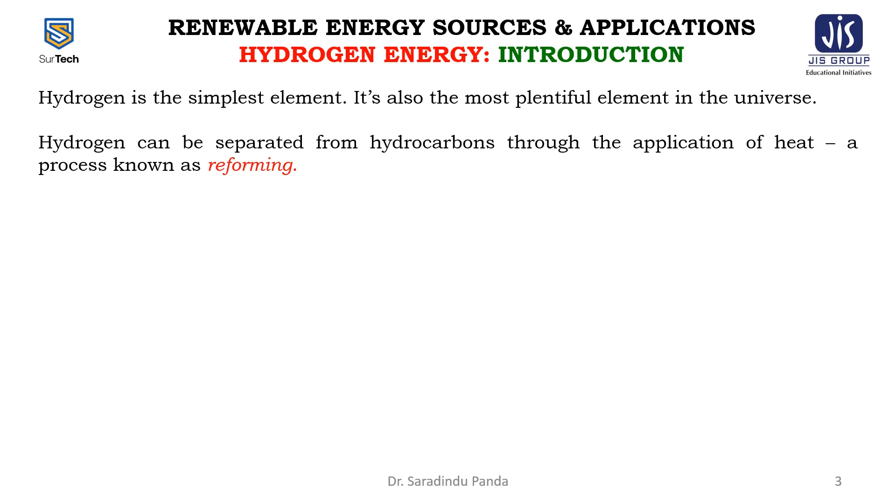Water, for example, is a combination of hydrogen and oxygen. Hydrogen is also found in many organic compounds, notably the hydrocarbons that make up many of our fuels, such as gasoline, natural gas, methanol, and propane. Hydrogen can be separated from hydrocarbons through the application of heat, a process known as reforming. Currently, most hydrogen is made this way from natural gas.

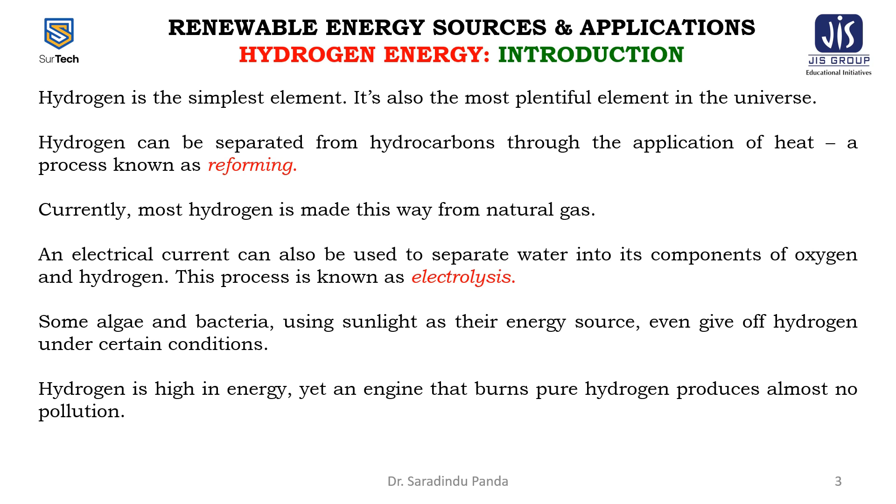An electrical current can also be used to separate water into its components of oxygen and hydrogen. This process is known as electrolysis. This is very much common to all. Some algae and bacteria, using sunlight as their energy source, even give off hydrogen under certain conditions. Hydrogen is high in energy, yet an engine that burns pure hydrogen produces almost no pollution.

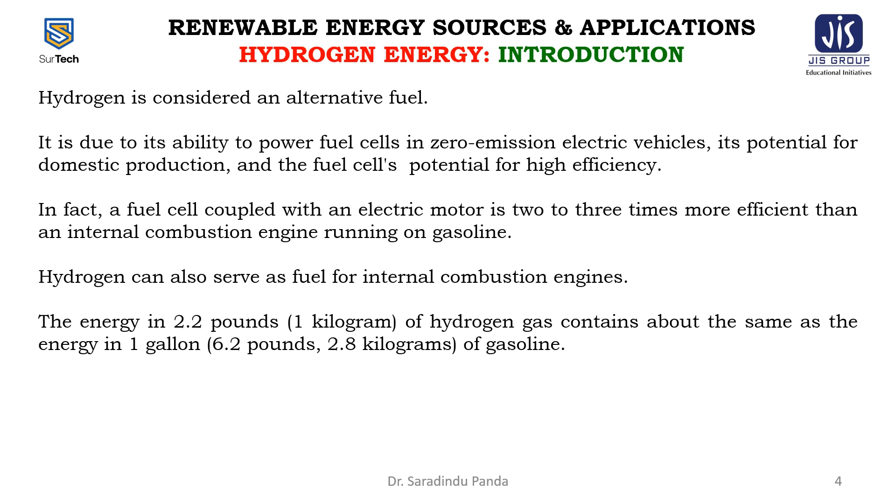Hydrogen is considered an alternative fuel due to its ability to power fuel cells in zero emission electric vehicles, its potential for domestic production and the fuel cell's potential for high efficiency. In fact, a fuel cell coupled with an electric motor is 2 to 3 times more efficient than an internal combustion engine running on gasoline. Hydrogen can also serve as fuel for internal combustion engines. The energy in 2.2 pounds of hydrogen gas is about the same as the energy in 1 gallon of gasoline.

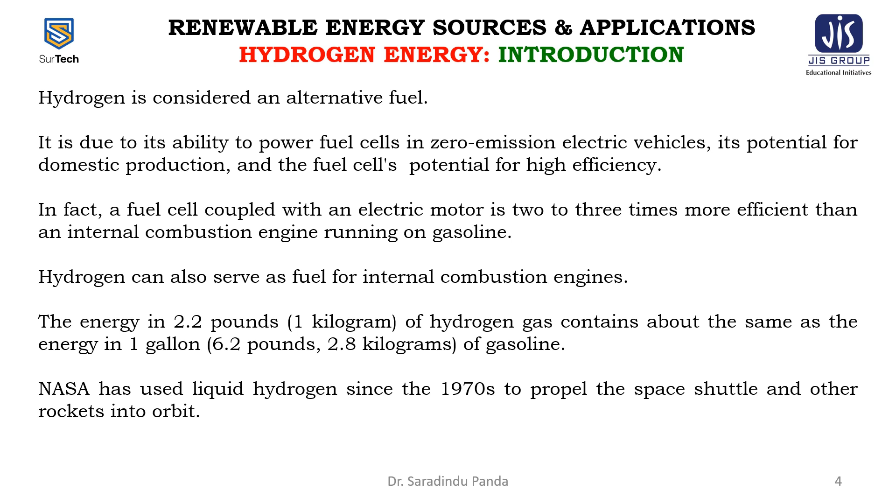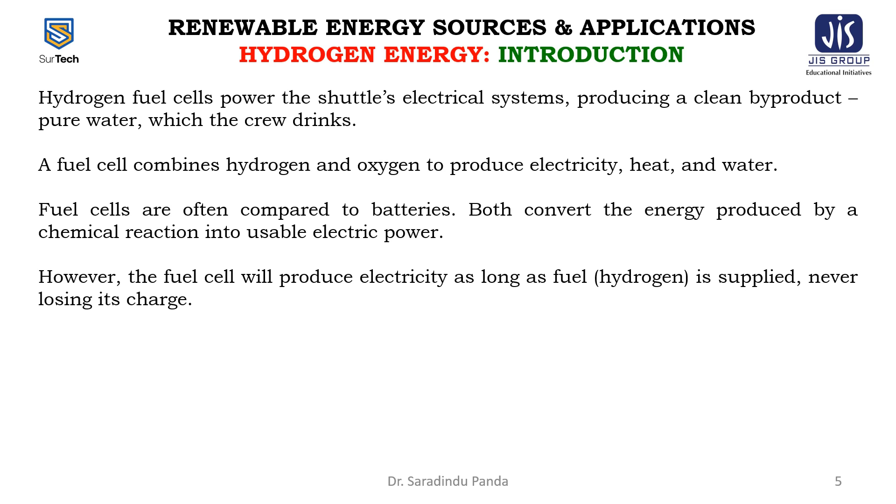NASA has used liquid hydrogen since the 1970s to propel the space shuttle and other rockets into orbit. Hydrogen fuel cells power the shuttle's electrical systems, producing a clean byproduct, pure water, which the crew drinks. A fuel cell combines hydrogen and oxygen to produce electricity, heat, and water. Fuel cells are often compared to batteries. Both convert the energy produced by a chemical reaction into usable electric power. However, the fuel cell will produce electricity as long as fuel is supplied, never losing its charge.

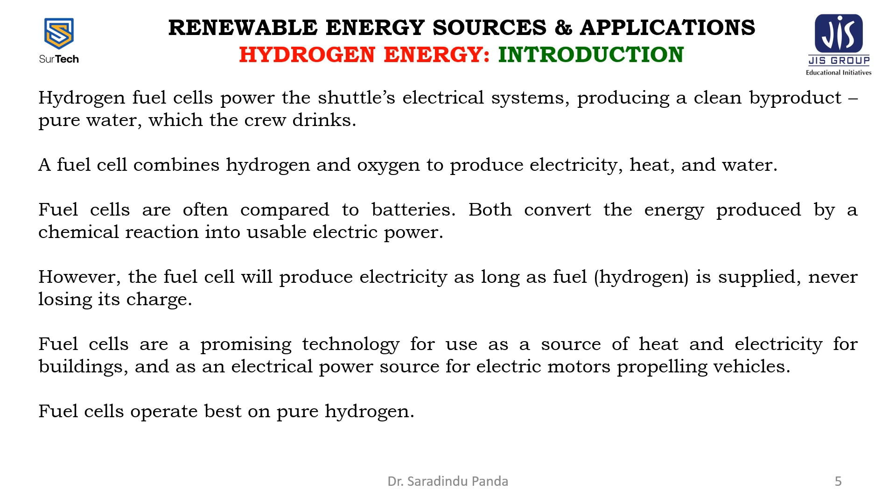Fuel cells are a promising technology for use as a source of heat and electricity for buildings and as an electrical power source for the electric motors propelling vehicles. Fuel cells operate best on pure hydrogen, but fuels like natural gas, methanol or even gasoline can be reformed to produce the hydrogen required for the fuel cell. Some fuel cells can even be fueled directly with methanol without using a reformer.

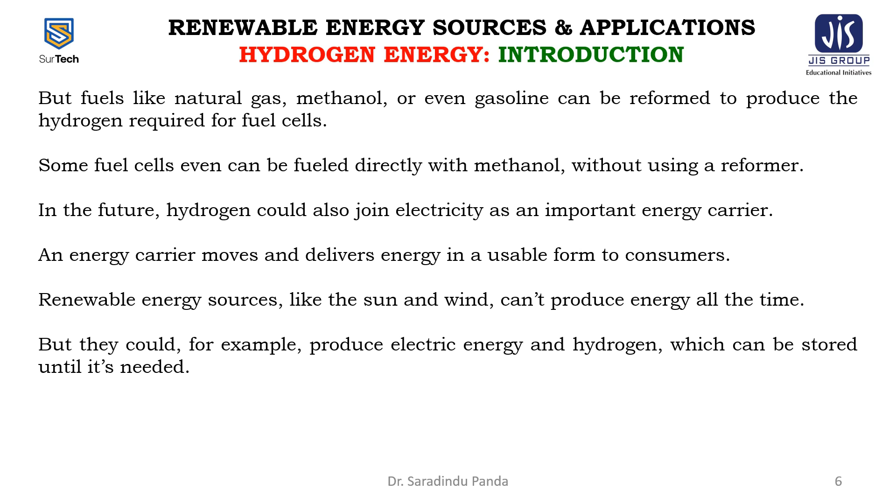In the future, hydrogen could also join electricity as an important energy carrier. An energy carrier moves and delivers energy in a usable form to consumers. Renewable energy sources like the sun and wind cannot produce energy all the time, but they could, for example, produce electric energy and hydrogen, which can be stored until it's needed. Hydrogen can also be transported to the locations where it is needed. This is the hydrogen cycle.

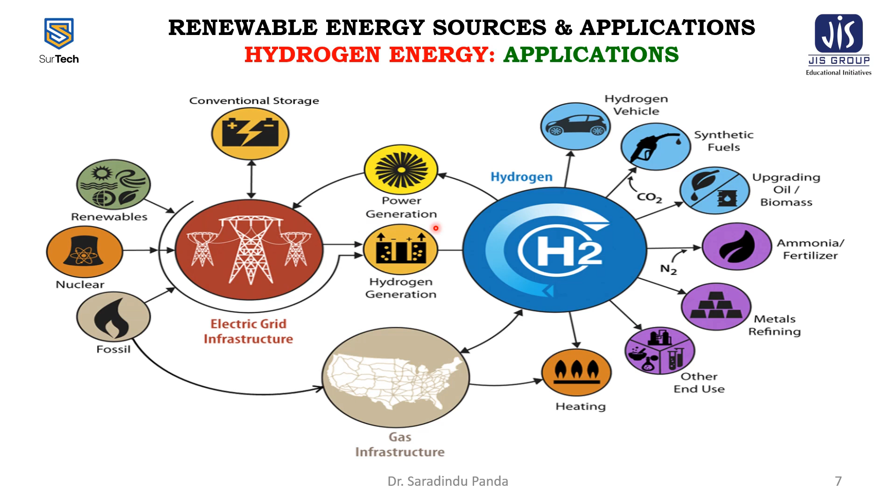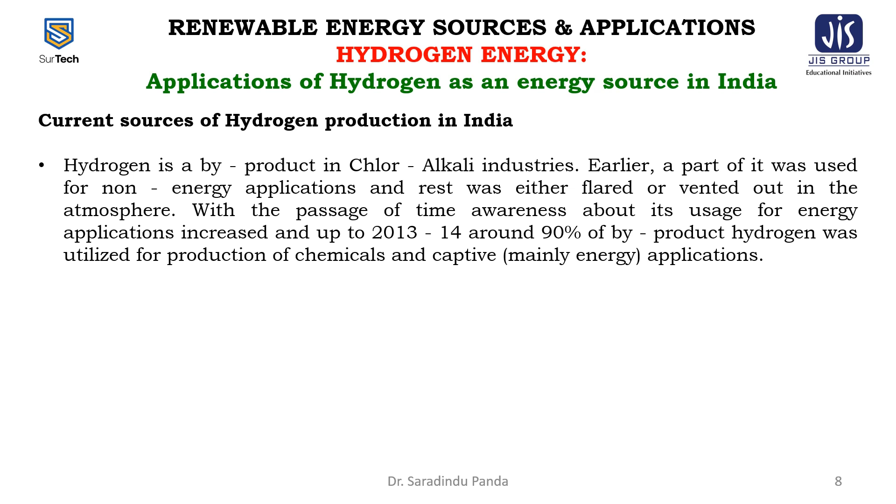The applications of hydrogen as an energy source in India. The current source of hydrogen production in India: the hydrogen is a byproduct of chlor-alkali industries. Earlier a part of it was used for non-energy applications and the rest was either flared or vented out into the atmosphere. With the passage of time, awareness about its usage for energy applications increased, and up to 2013-14 around 90% of the byproduct hydrogen was utilized for the production of chemicals and captive applications.

Hydrogen is produced for non-energy applications like in fertilizer industries and petroleum refineries. As per the National Hydrogen Energy Roadmap, called NHERM, with a view to accelerate the development of the hydrogen energy sector in India, a National Hydrogen Energy Roadmap was prepared and adopted by the National Hydrogen Energy Board in January 2006 for implementation.

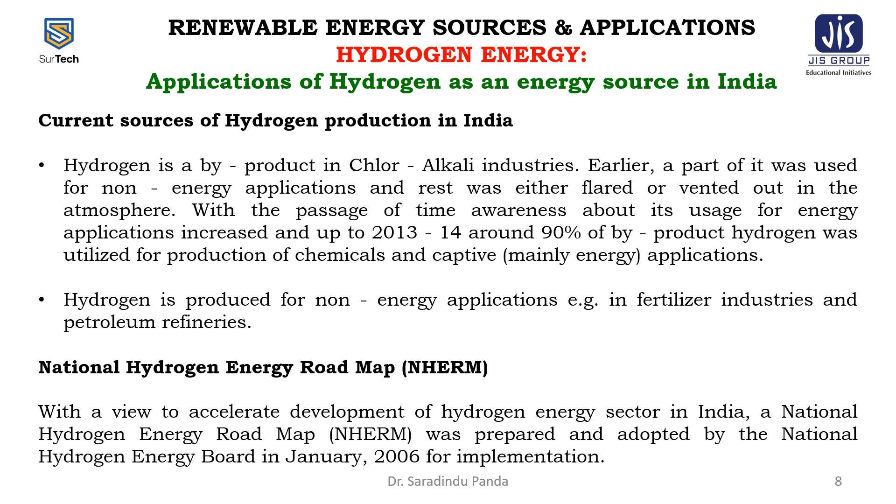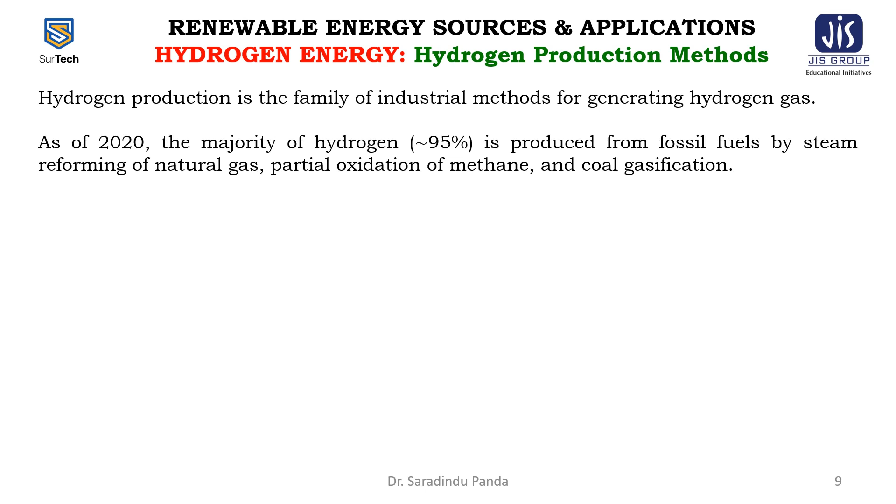Now the very important stage of my lecture, that is the hydrogen production methods. Hydrogen production is the family of industrial methods for generating hydrogen gas. As of 2020, the majority of hydrogen, approximately 95% of it, is produced from fossil fuels by steam reforming of natural gas, partial oxidation of methane, and coal gasification. Other methods of hydrogen production include biomass gasification and electrolysis of water.

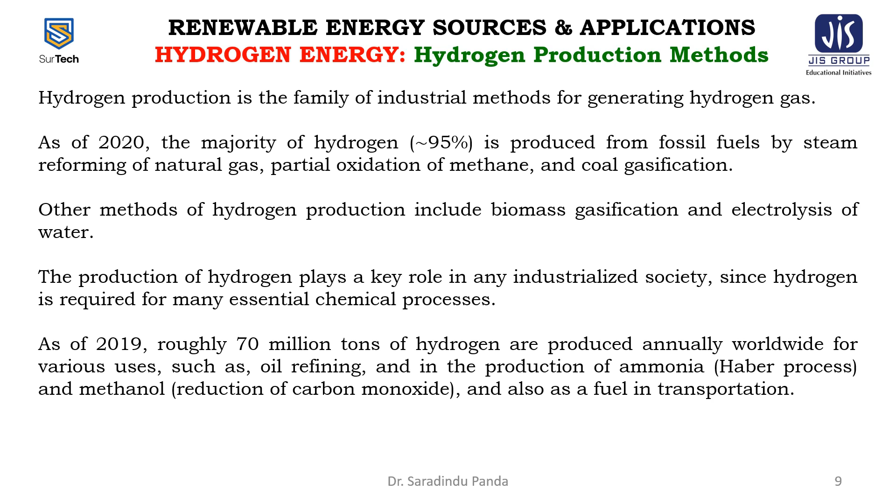The production of hydrogen plays a key role in any industrialized society, since hydrogen is required for many essential chemical processes. As of 2019, roughly 70 million tons of hydrogen are produced annually worldwide for various uses such as oil refining and in the production of ammonia, methanol, and also as a fuel in transportation. There are four main sources for the commercial production of hydrogen, that is natural gas, oil, coal, and electrolysis, which account for 48%, 30%, 18%, and 4% respectively of the world's hydrogen production.

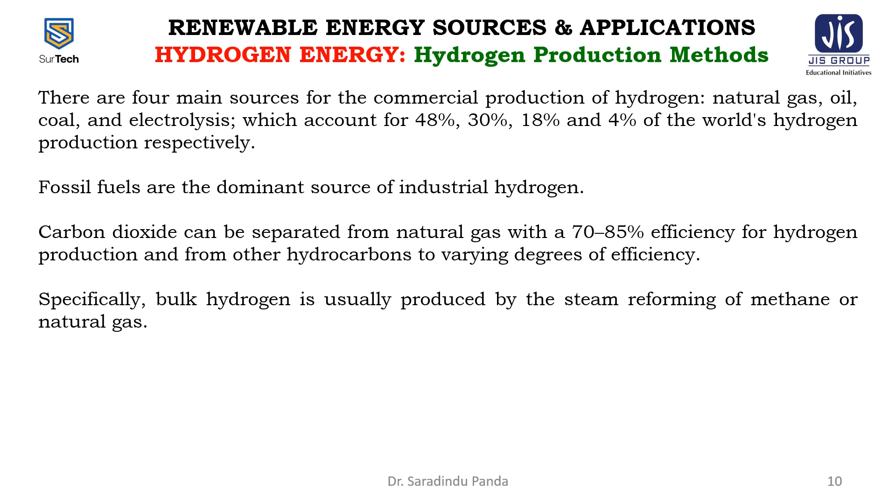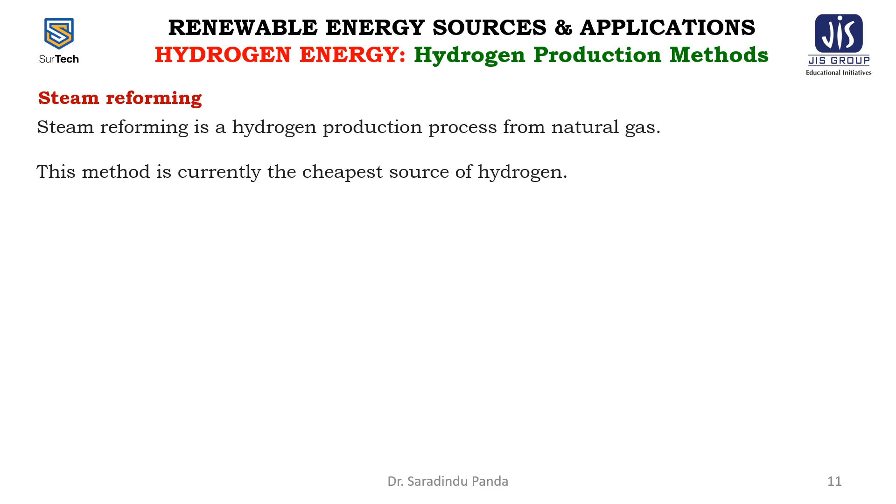Fossil fuels are the dominant source of industrial hydrogen. Carbon dioxide can be separated from natural gas with a 70 to 85% efficiency for hydrogen production, and from other hydrocarbons to varying degrees of efficiency. Specifically, bulk hydrogen is usually produced by the steam reforming of methane or natural gas. Hydrogen production methods: the first method is steam reforming. Steam reforming is a hydrogen production process from natural gas. This method is currently the cheapest source of hydrogen.

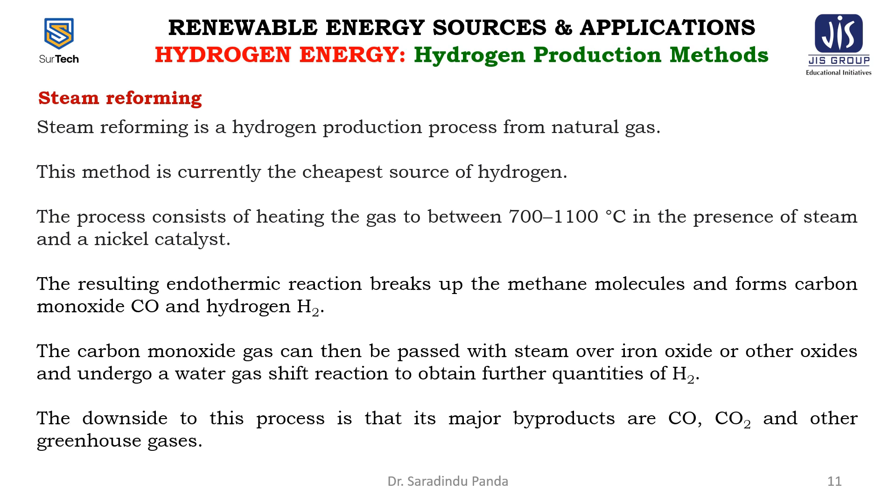The process consists of heating the gas to between 700 and 1100 degrees centigrade in the presence of steam and a nickel catalyst. The resulting endothermic reaction breaks up the methane molecules and forms carbon monoxide and hydrogen. The carbon monoxide gas can then be passed with steam over iron oxide or other oxides and undergo a water gas shift reaction to obtain further quantities of hydrogen. The downside to this process is that its major byproducts are carbon dioxide, carbon monoxide and other greenhouse gases.

Depending on the quality of the feedstock, natural gas, rich gases, naphtha, 1 ton of hydrogen produced will also produce 9 to 12 tons of carbon dioxide. For this process, at high temperature, 700 to 1100 degrees centigrade, steam reacts with methane in an endothermic reaction to yield syngas: CH4 + H2O → CO + 3H2. In a second stage, additional hydrogen is generated through the lower temperature exothermic water gas shift reaction performed at 360 degrees centigrade: CO + H2O → CO2 + H2.

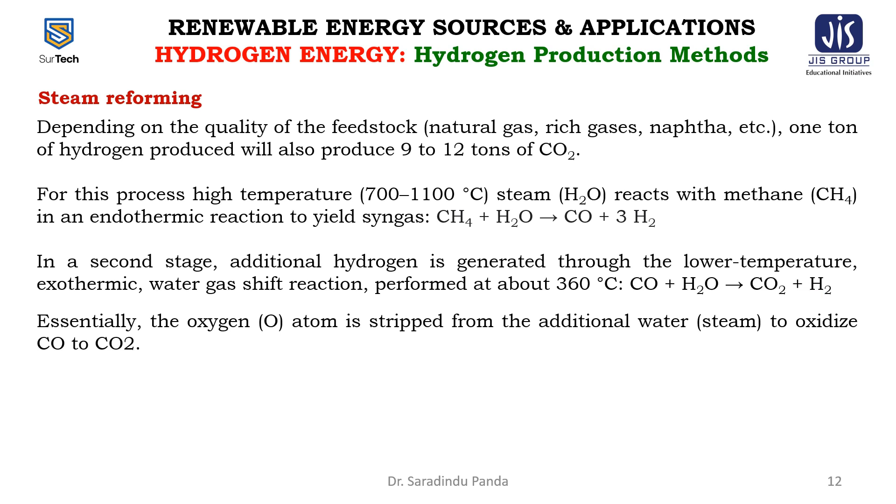Essentially, the oxygen atom is stripped from the additional water, that is steam, to oxidize the carbon monoxide to carbon dioxide. This oxidation also provides the energy to maintain the reaction. Additional heat required to drive the process is generally supplied by burning some portion of the methane.

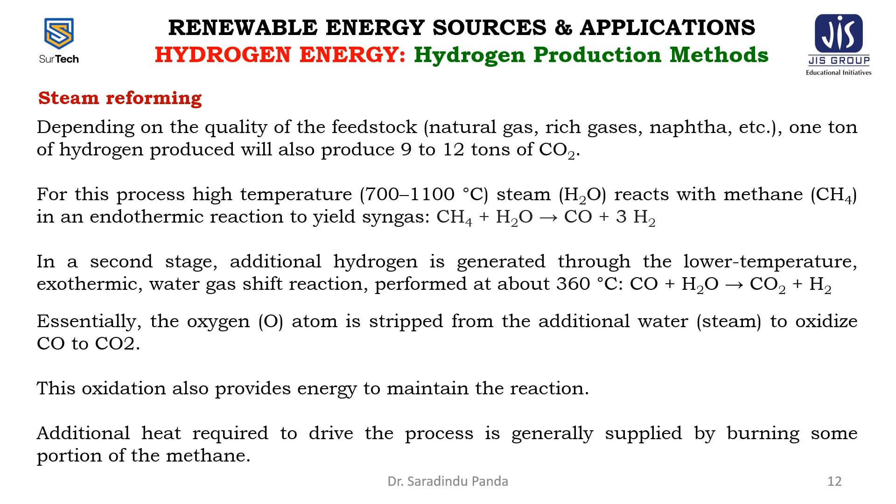The second method is from water. Methods to produce hydrogen without the use of fossil fuels involve the process of water splitting, or splitting the water molecule into its components oxygen and hydrogen. When the source of energy for water splitting is renewable or low carbon, the hydrogen produced is sometimes referred to as green hydrogen. The conversion can be accomplished in several ways, but all methods are generally more expensive than fossil fuel based production methods.

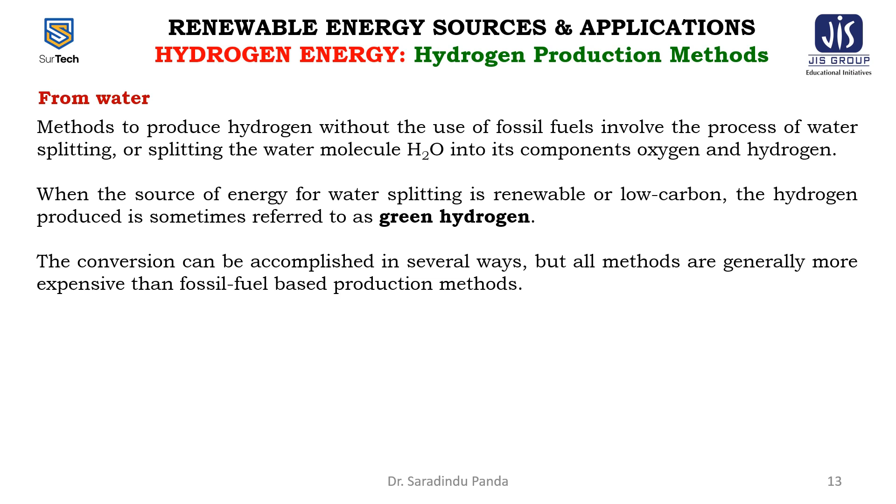Electrolysis is the common method to split water and yield hydrogen and oxygen. Electrolysis consists of using electricity to split water into hydrogen and oxygen. Electrolysis of water is 70 to 80% efficient, while steam reforming of natural gas has a thermal efficiency between 70 and 85%.

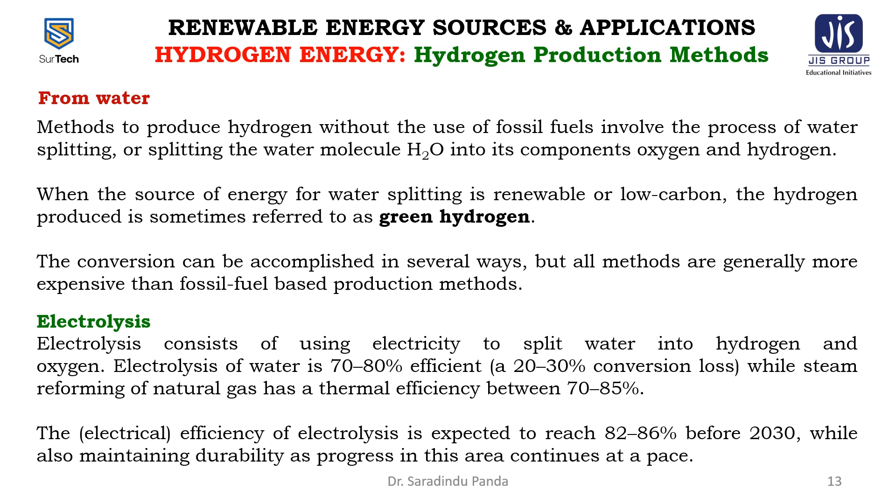The efficiency of electrolysis is expected to reach 82 to 86% before 2030, while also maintaining durability as progress in this area continues at a pace.

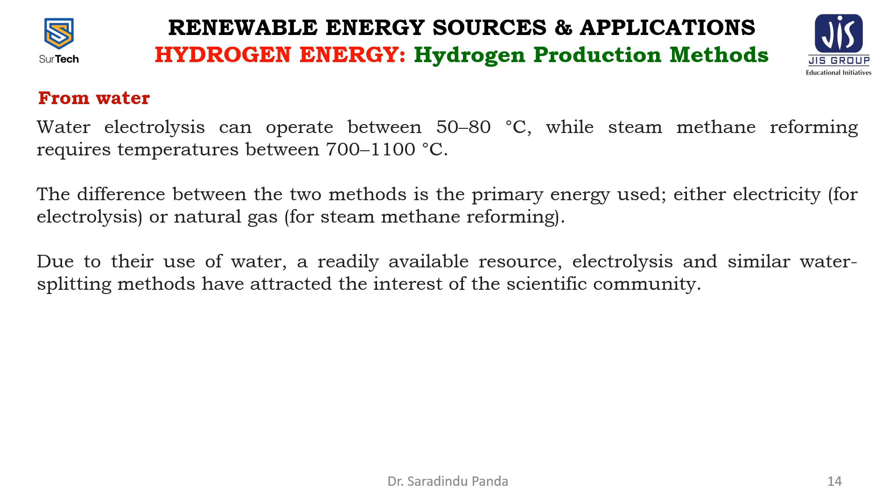Water electrolysis can operate between 50 to 80 degrees centigrade, while steam methane reforming requires temperatures between 700 to 1100 degrees centigrade. The difference between the two methods is the primary energy used, either electricity or natural gas. Due to their use of water, a readily available resource, electrolysis and similar water splitting methods have attracted the interest of the scientific community.

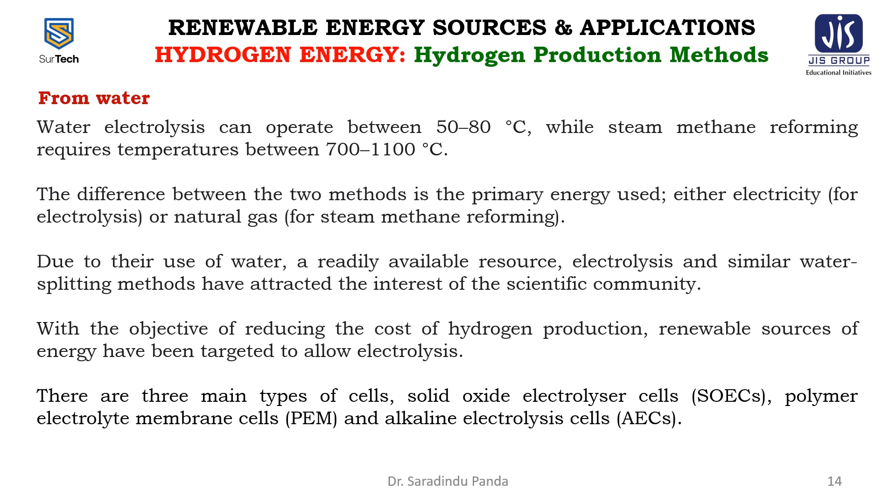With the objective of reducing the cost of hydrogen production, renewable sources of energy have been targeted to allow the electrolysis. There are three main types of cells: solid oxide electrolyzer cells, called SOEC, polymer electrolyte membrane cell, called PEM, and alkaline electrolysis cells, called AEC.

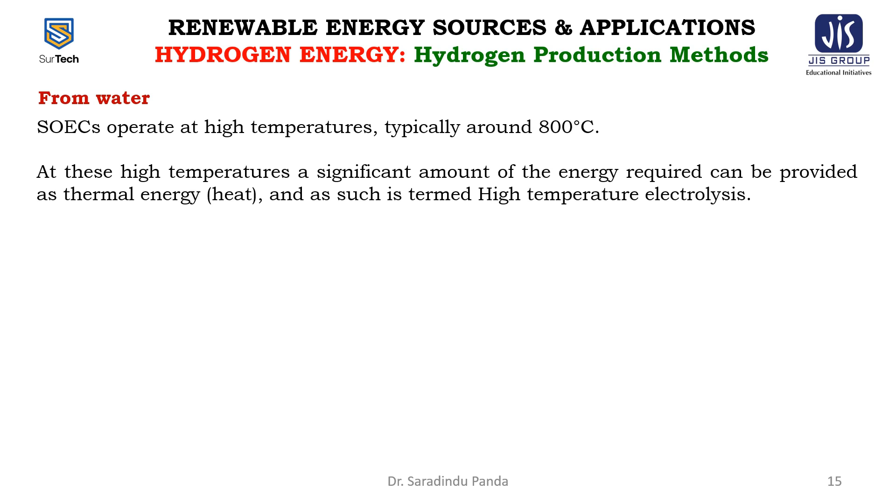The SOECs operate at high temperatures, typically around 800 degrees centigrade. At these high temperatures, a significant amount of the energy required can be provided as thermal energy, and as such it is termed high temperature electrolysis. The heat energy can be provided from a number of different sources, including waste industrial heat, nuclear power stations, or concentrated solar thermal plants. This has the potential to reduce the overall cost of the hydrogen produced by reducing the amount of electrical energy required for electrolysis.

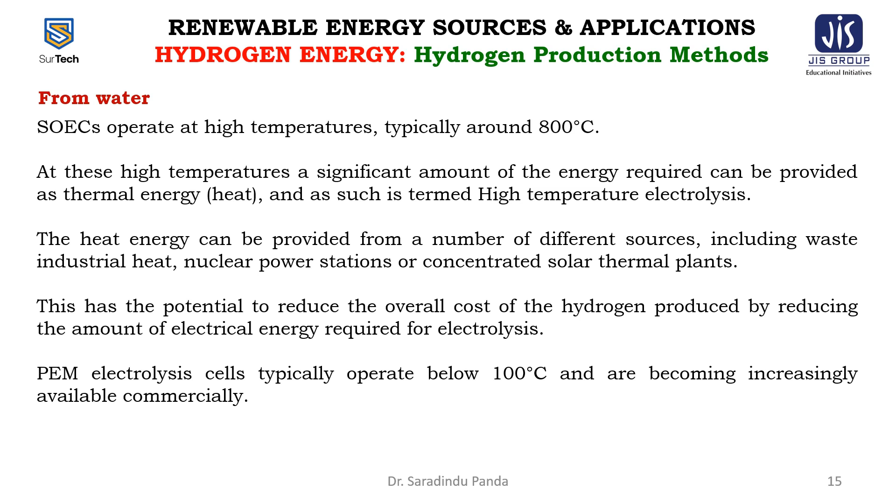PEM electrolysis cells typically operate below 100 degrees centigrade and are becoming increasingly available commercially. These cells have the advantage of being comparatively simple and can be designed to accept widely varying voltage inputs, which makes them ideal for use with renewable sources of energy such as solar photovoltaic cells.

The AECs optimally operate at high concentrations of electrolyte such as KOH or potassium carbonate, and at high temperatures close to 200 degrees centigrade.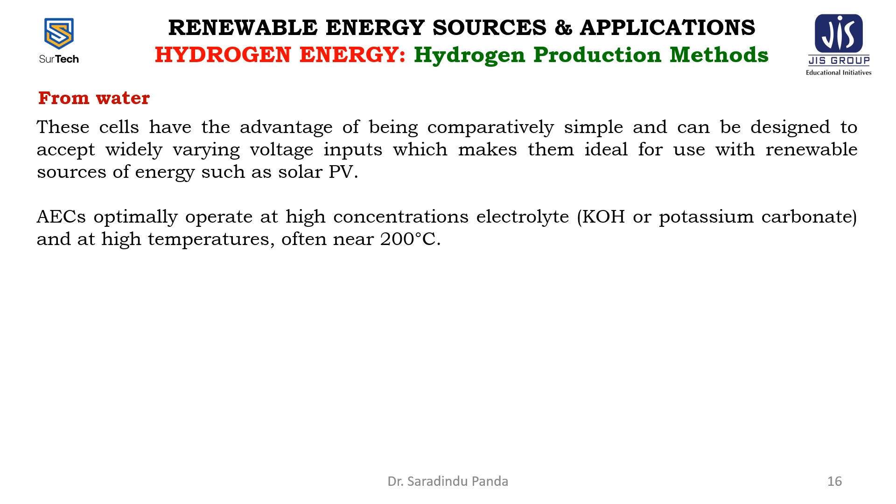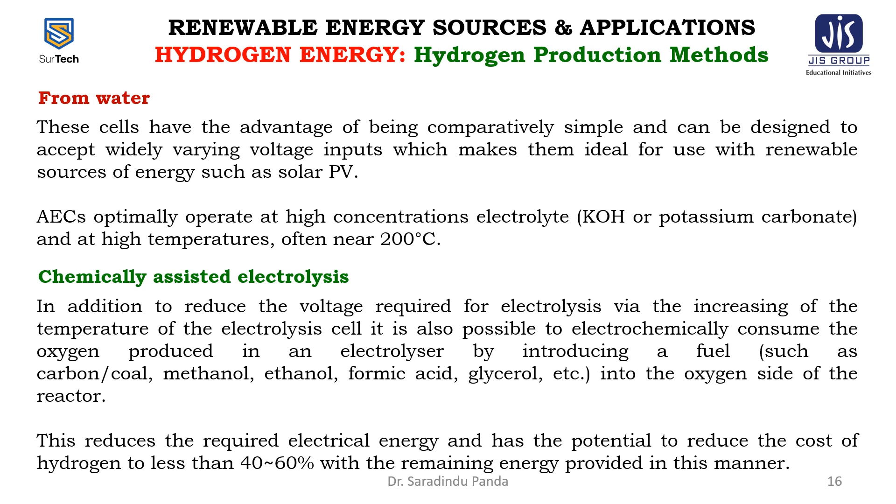Now, chemically assisted electrolysis. In addition to reducing the voltage required for electrolysis via increasing the temperature of the electrolysis cell, it is also possible to electrochemically consume the oxygen produced in an electrolyzer by introducing a fuel such as carbon, coal, methanol, ethanol, formic acid, glycerol, etc. into the oxygen side of the reactor. This reduces the required electrical energy and has the potential to reduce the cost of hydrogen to less than 40 to 60% with the remaining energy provided in this manner.

In addition, carbon or hydrocarbon assisted water electrolysis, called CAWE, has the potential to offer a less energy intensive, cleaner method of using the chemical energy in various sources of carbon such as low rank and high sulfur coals, biomass, alcohols, and methane, where the pure carbon dioxide produced can be easily sequestered without the need for separation.

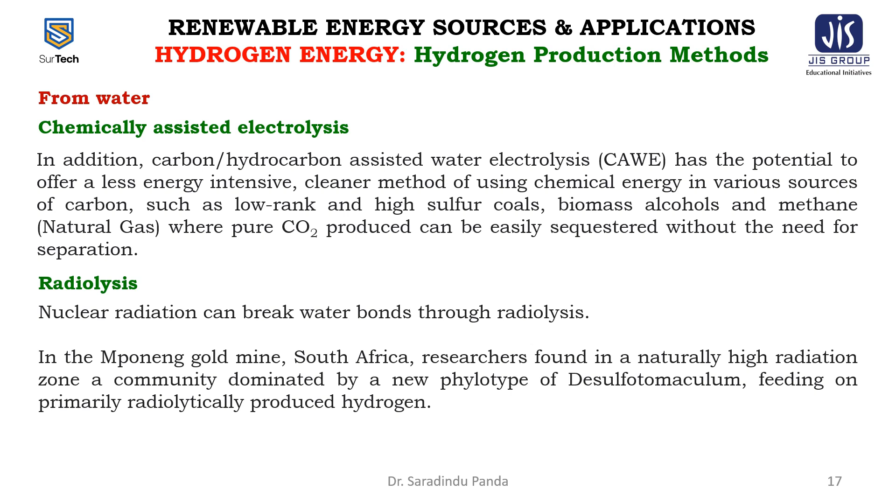Second is radiolysis. Nuclear radiation can break the water bonds through radiolysis. In the Mponeng gold mine in South Africa, researchers found in a naturally high radiation zone a community dominated by a new phylotype of Desulfotomaculum feeding primarily on radiolytically produced hydrogen. Spent nuclear fuel is also being looked at as a potential source of hydrogen.

Thermolysis. Water spontaneously dissociates at around 2500 degrees centigrade, but this thermolysis occurs at temperatures too high for usual process piping and equipment. Catalysts are required to reduce the dissociation temperature.

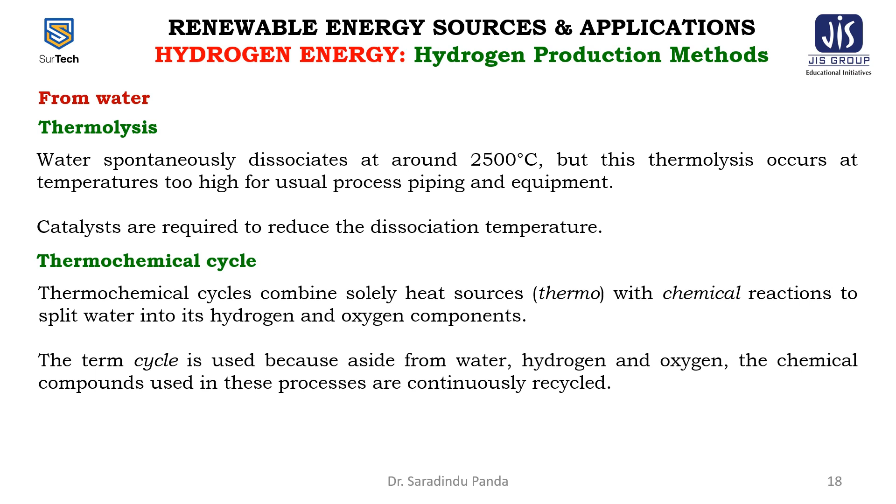Thermochemical cycle. Thermochemical cycles combine solely heat sources with chemical reactions to split water into its hydrogen and oxygen components. The term cycle is used because, aside from water, the hydrogen and oxygen, the chemical compounds used in this process are continuously recycled. If electricity is partially used as an input, the resulting thermochemical cycle is defined as a hybrid cycle.

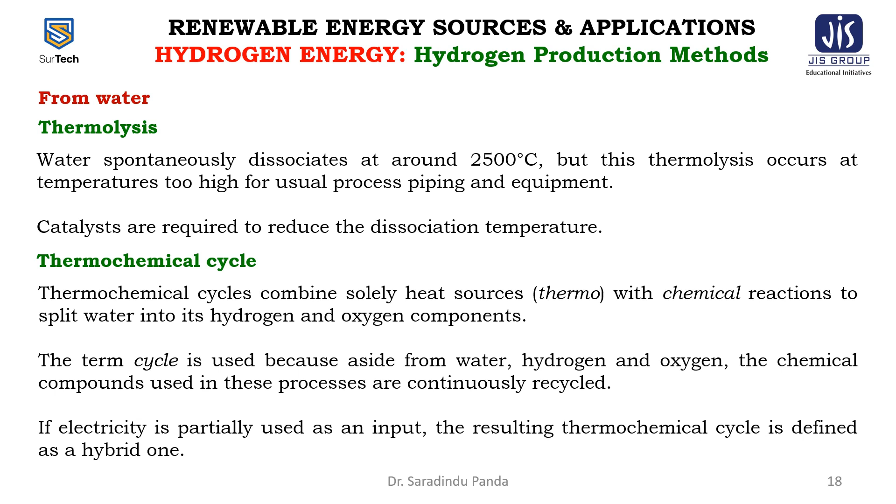The sulfur iodine cycle, SI cycle, is a thermochemical cycle process which generates hydrogen from water with an efficiency of approximately 50%. The sulfur and iodine used in the process are recovered and reused, and not consumed by the process.

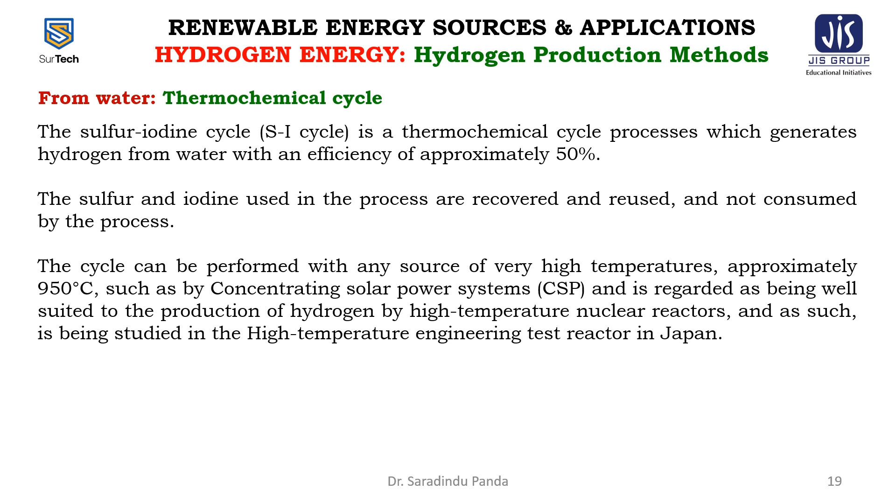The cycle can be performed with any source of very high temperatures, approximately 950 degrees centigrade, such as concentrating solar power systems, and is regarded as being well suited to the production of hydrogen by high temperature nuclear reactors, and as such is being studied in the high temperature engineering test reactor in Japan.

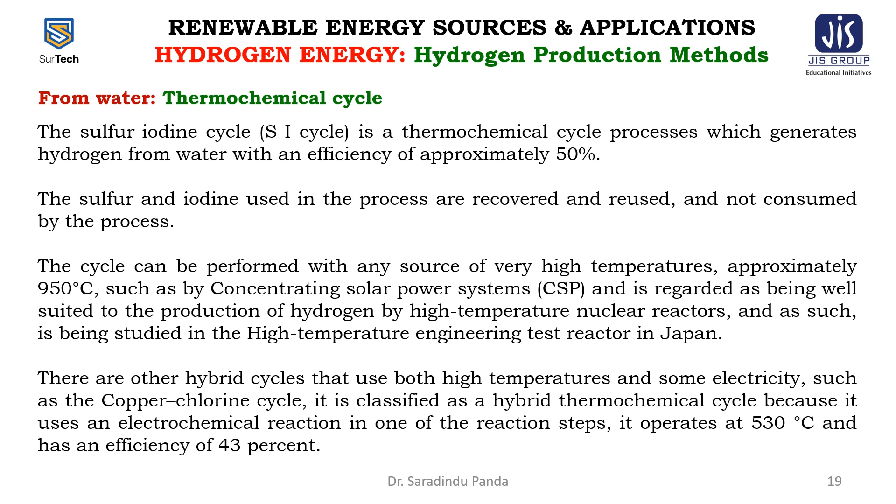There are other hybrid cycles that use both high temperatures and some electricity, such as the copper chlorine cycle. It is classified as a hybrid thermochemical cycle because it uses an electrochemical reaction in one of the reaction steps. It operates at 530 degrees centigrade and has an efficiency of near 43%.

Another type of hydrogen production method is the ferrosilicon method. Ferrosilicon is used by the military to quickly produce hydrogen for balloons. The chemical reaction uses sodium hydroxide, ferrosilicon and water. The generator is small enough to fit a truck and requires only a small amount of electric power. The materials are stable and not combustible, and they do not generate hydrogen until mixed. The method has been in use since World War I.

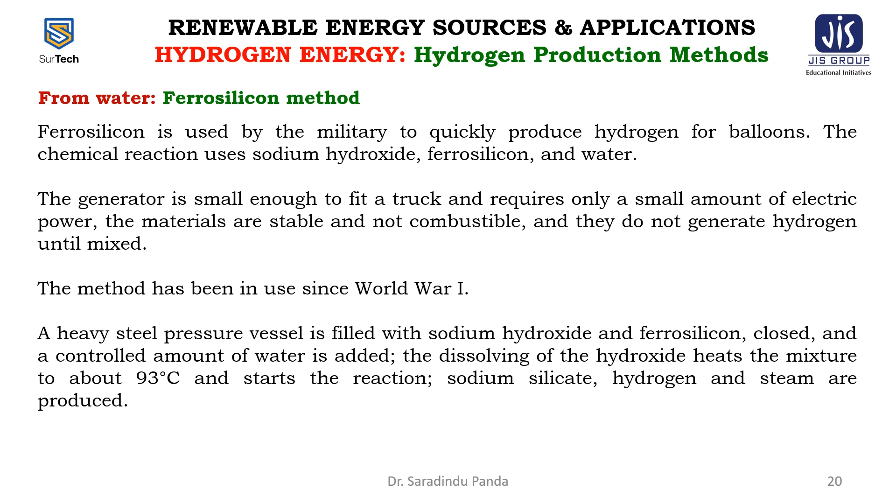A heavy steel pressure vessel is filled with sodium hydroxide and ferrosilicon. Once closed, a controlled amount of water is added. The dissolving of the hydroxide heats the mixture to about 93 degrees centigrade and starts the reaction. Sodium silicate, hydrogen and steam are produced.

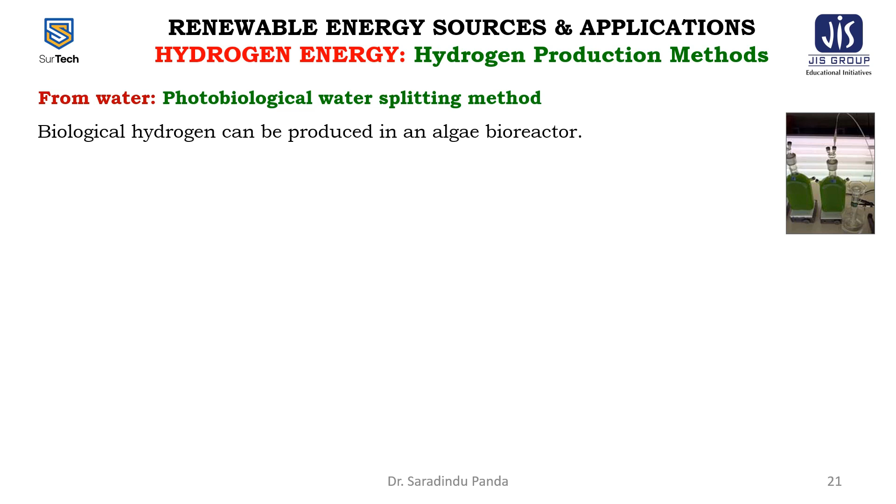Another process from water is the photobiological water splitting method. Biological hydrogen can be produced in an algae bioreactor. In the late 1990s, it was discovered that if the algae are deprived of sulfur, they will switch from the production of oxygen, that is normal photosynthesis, to the production of hydrogen. It seems that the production is now economically feasible by surpassing the 7 to 10% energy efficiency barrier with a hydrogen production rate of 10 to 12 ml per liter culture per hour.

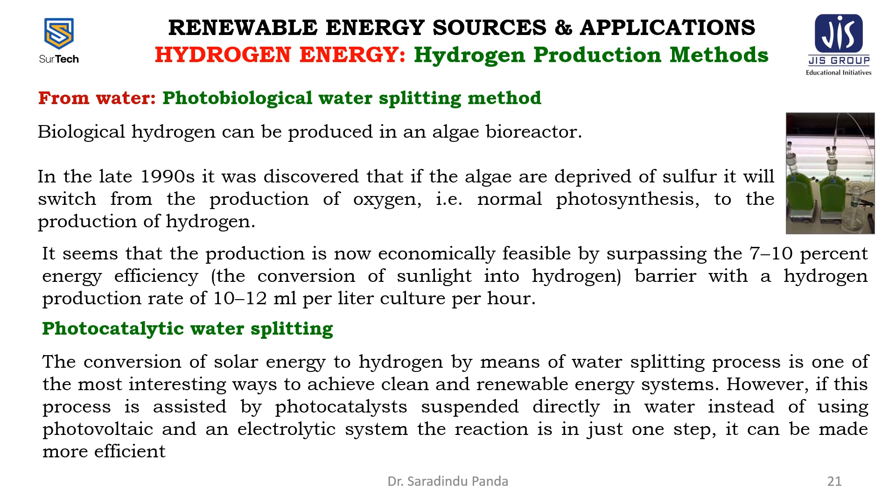Photocatalytic water splitting, the conversion of solar energy to hydrogen by means of the water splitting process, is one of the most interesting ways to achieve clean and renewable energy systems. However, if this process is assisted by photocatalysts suspended directly in water instead of using a photovoltaic and an electrolytic system, the reaction is in just one step. It can be made more efficient.

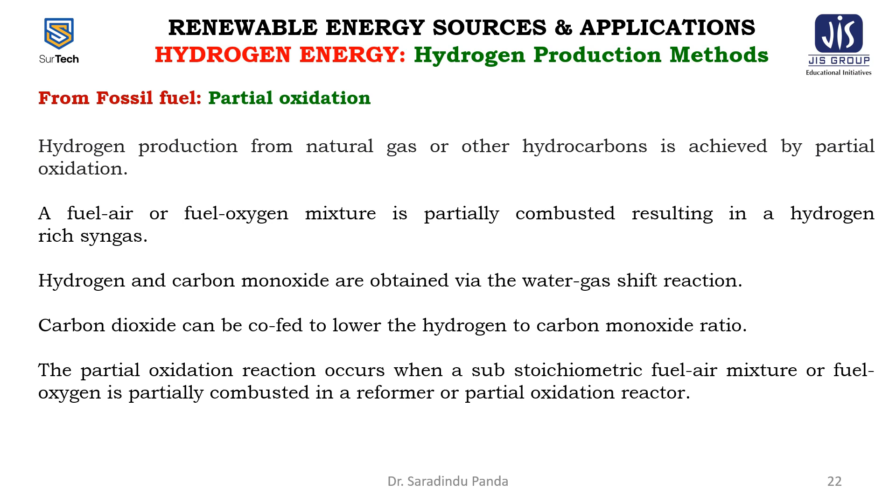Partial oxidation from fossil fuel. Hydrogen production from natural gas or other hydrocarbons is achieved by partial oxidation. A fuel-air or fuel-oxygen mixture is partially combusted, resulting in a hydrogen-rich syngas. Hydrogen and carbon monoxide are obtained via the water-gas shift reaction. Carbon dioxide can be co-fed to lower the hydrogen to carbon monoxide ratio. The partial oxidation reaction occurs when a sub-stoichiometric fuel-air mixture or fuel-oxygen is partially combusted in a reformer or partial oxidation reactor.

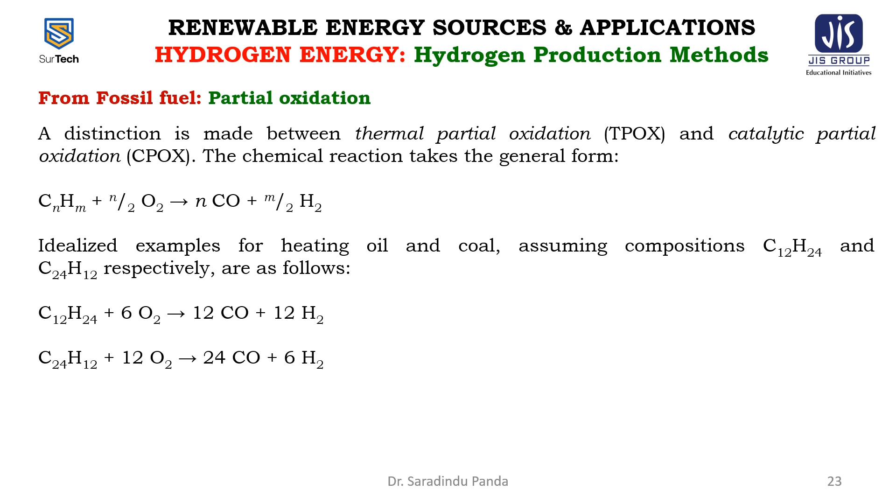A distinction is made between thermal partial oxidation and catalytic partial oxidation. The chemical reaction takes the general form: CnHm + n/2 O2 yields nCO + m/2 H2. Idealized examples for heating oil and coal, assuming compositions of C12H24 and C24H12 respectively, are as follows: C12H24 + 6O2 yields 12CO + 12H2, and C24H12 + 12O2 yields 24CO + 6H2.

From fossil fuel, another method is plasma reforming. The Kvaerner process, or the Kvaerner carbon black and hydrogen process, is a plasma reforming method developed in the 1980s by a Norwegian company of the same name for the production of hydrogen and carbon black from liquid hydrocarbons. Of the available energy of the feed, approximately 48% is contained in the hydrogen, 40% is contained in activated carbon, and 10% in the superheated steam. Carbon dioxide is not produced in the process.

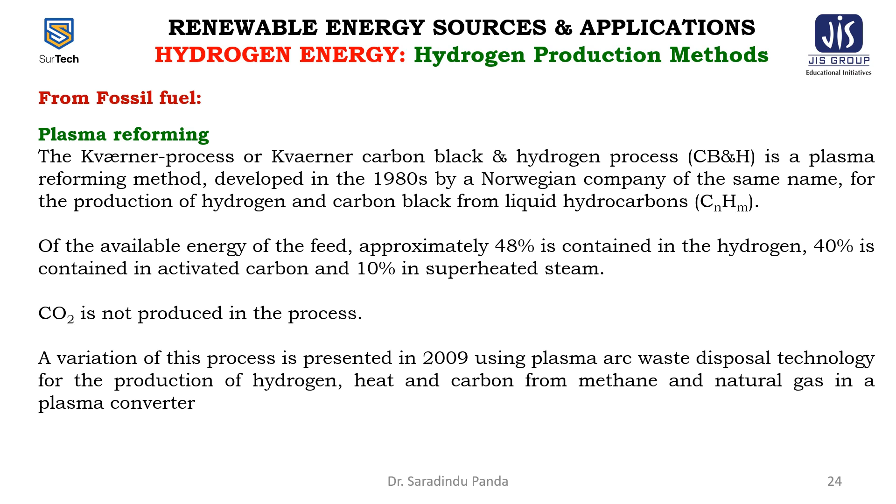A variation of this process was presented in 2009 using plasma arc waste disposal technology for the production of hydrogen, heat, and carbon from methane and natural gas in a plasma converter.

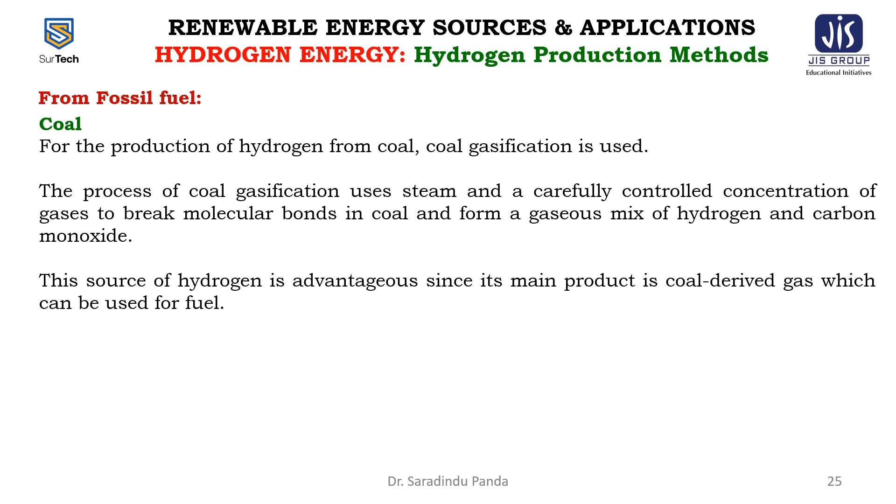Another fossil fuel process is from coal. For the production of hydrogen from coal, gasification is used. The process of coal gasification uses steam and a carefully controlled concentration of gases to break the molecular bonds in the coal and form a gaseous mix of hydrogen and carbon monoxide. This source of hydrogen is advantageous since its main product is coal-derived gas, which can be used for fuel.

The gas obtained from coal gasification can later be used to produce electricity more efficiently and allow a better capture of greenhouse gases than the traditional burning of coal. Another method for conversion is low temperature and high temperature coal carbonization.

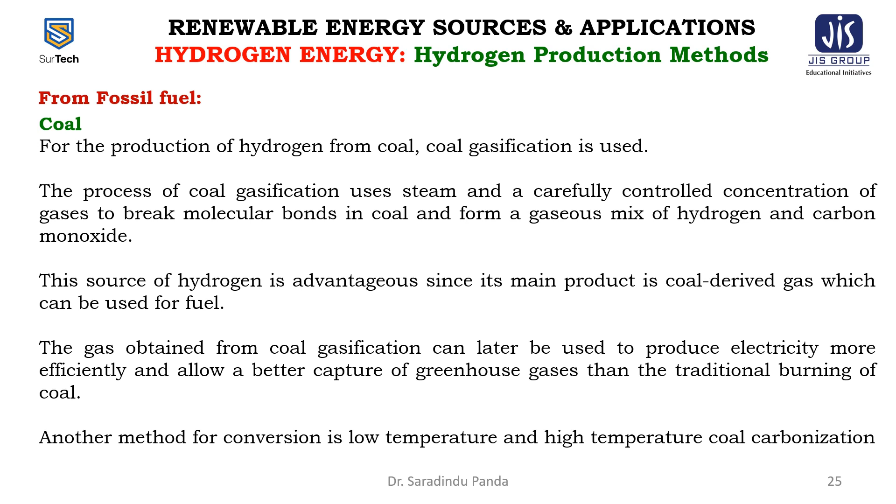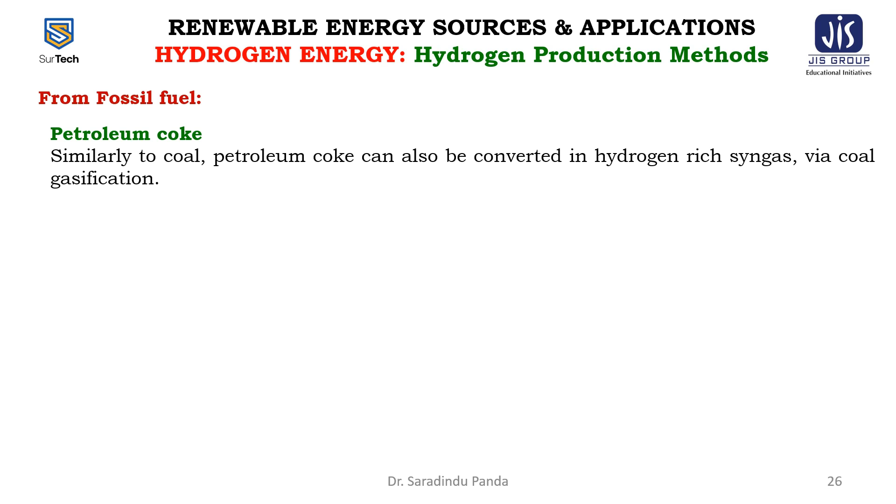Another process is from petroleum coke. Similarly to coal, petroleum coke can also be converted into hydrogen-rich syngas via coal gasification. The syngas in this case consists mainly of hydrogen, carbon monoxide, and hydrogen sulfide, depending on the sulfur content of the coke feed. Gasification is an attractive option for production of hydrogen from almost any carbon source while providing attractive hydrogen utilization alternatives through the process.

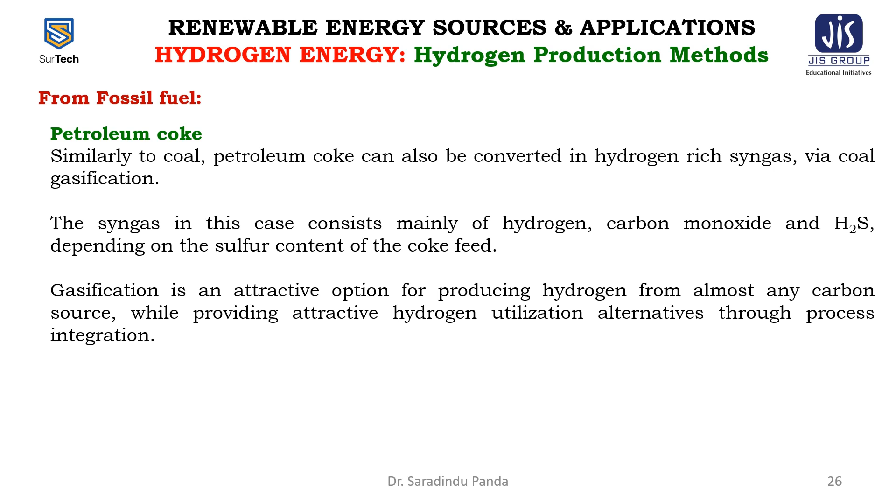Another method is fermentative hydrogen production, which is the fermentative conversion of organic substrate to biohydrogen manifested by a diverse group of bacteria using multi-enzyme systems involving three steps similar to anaerobic conversion. Dark fermentation reactions do not require light energy, so they are capable of constantly producing hydrogen from organic compounds throughout the day and night.

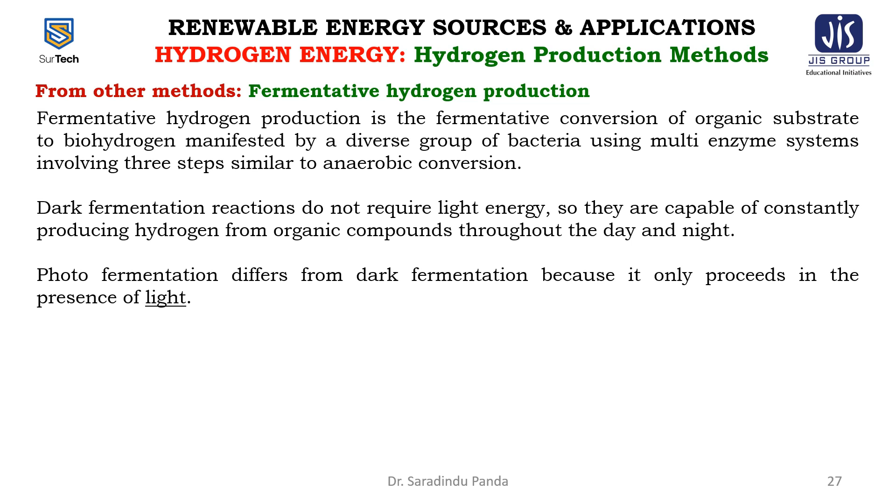Photofermentation differs from dark fermentation because it only proceeds in the presence of light. For example, photofermentation with Rhodobacter sphaeroides SH2C can be employed to convert small molecular fatty acids into hydrogen. Fermentative hydrogen production can be done using direct biophotolysis by green algae, indirect biophotolysis by cyanobacteria, photofermentation by anaerobic photosynthetic bacteria, and dark fermentation by anaerobic fermentative bacteria.

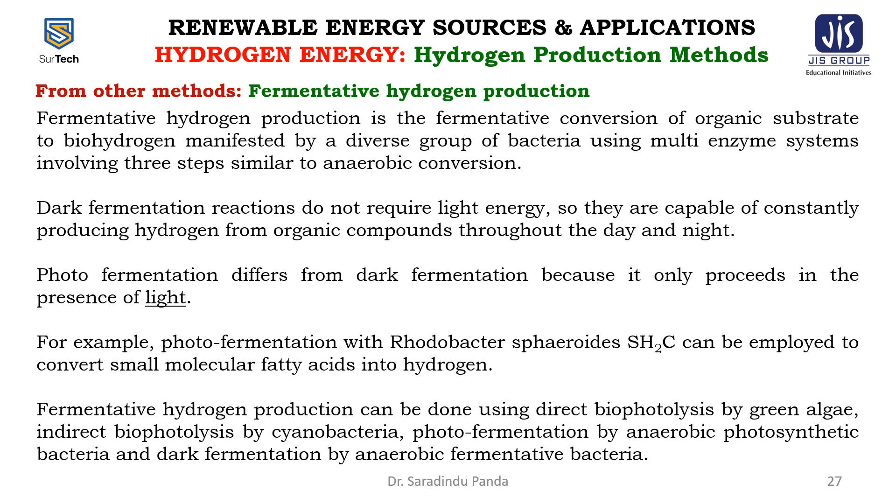For example, studies on hydrogen production using H. salinarium and anaerobic photosynthetic bacteria coupled to a hydrogenase donor like E. coli are reported in the literature.

Enterobacter aerogenes is an outstanding hydrogen producer. It is an anaerobic facultative and mesophilic bacterium that is able to consume different sugars, and in contrast to the cultivation of strict anaerobics, no special operation is required to remove all oxygen from the fermenter.

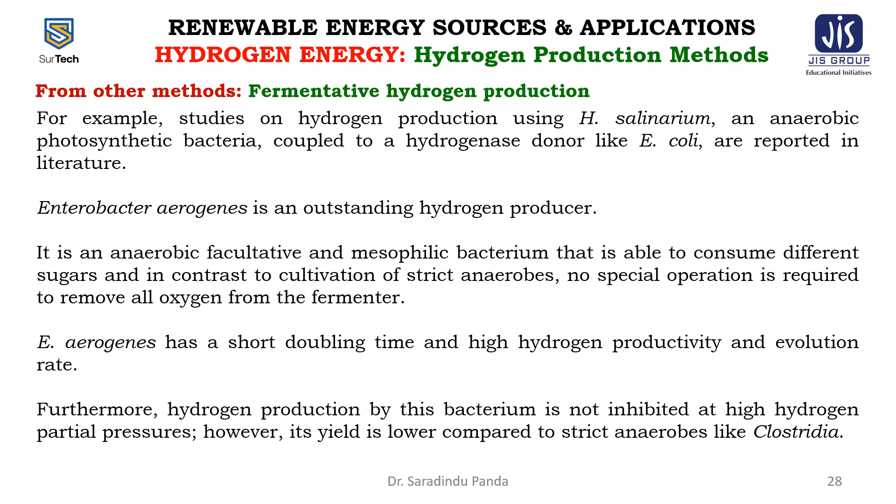Enterobacter aerogenes has a short doubling time and high hydrogen productivity and evolution rate. Furthermore, hydrogen production by this bacterium is not inhibited at high hydrogen partial pressures. However, its yield is lower compared to strict anaerobics like Clostridia.

A theoretical maximum of 4 moles of hydrogen per mole of glucose can be produced by strict anaerobic bacteria. Facultative anaerobic bacteria such as Enterobacter aerogenes have a theoretical maximum yield of 2 moles of hydrogen per mole of glucose.

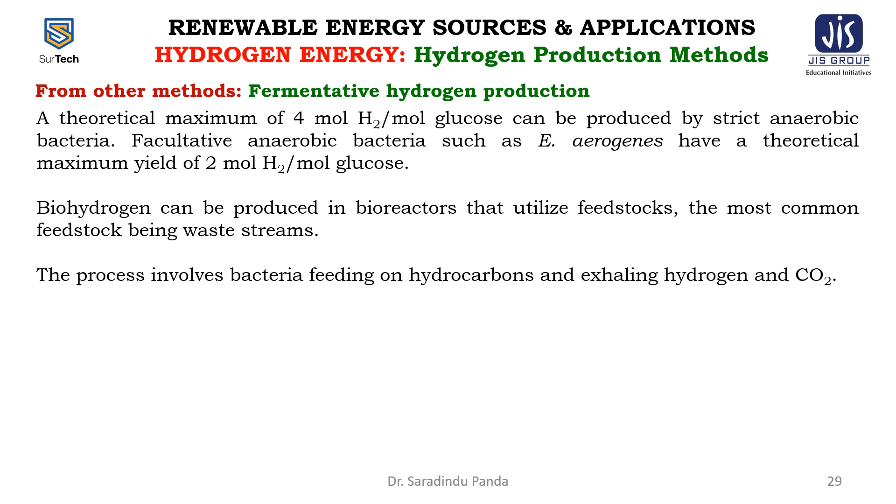Biohydrogen can be produced in bioreactors that utilize feedstocks, the most common being waste streams. The process involves bacteria feeding on hydrocarbons and exhaling hydrogen and carbon dioxide. The carbon dioxide can be sequestered successfully by several methods, leaving the hydrogen gas.

In 2006 to 2007, NanoLogix first demonstrated a prototype hydrogen bioreactor using waste as a feedstock at the Welch's grape juice factory in Pennsylvania.

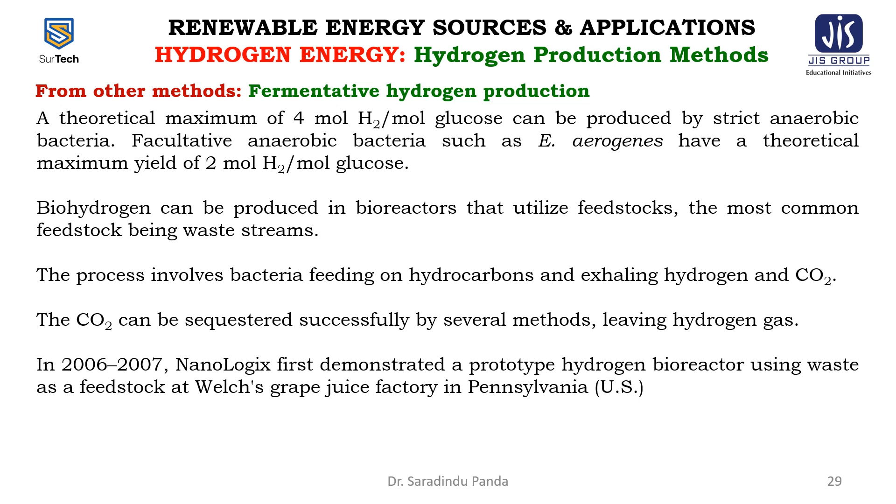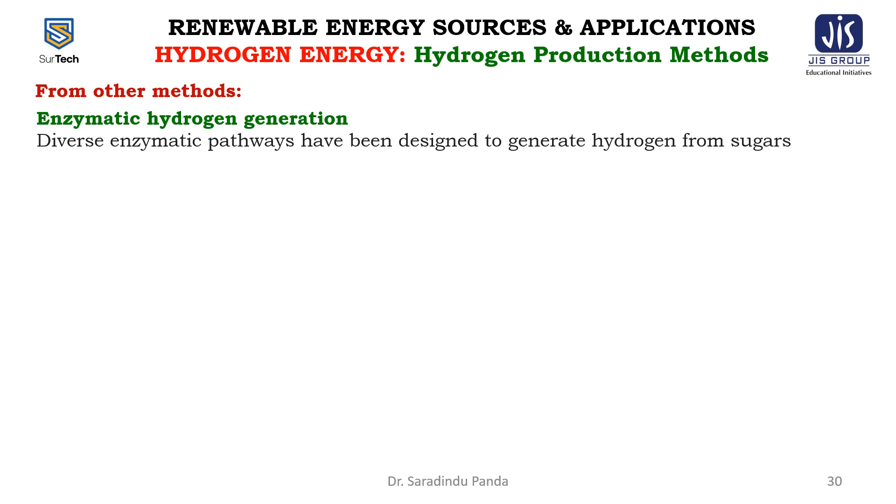Besides dark fermentation, electrohydrogenesis is another possibility. Using microbial fuel cells, wastewater or plants can be used to generate power. Plants are grown and the chopped up plant waste fermentation produces acetic acid. Then bacteria consume the acetic acid, releasing electrons, protons, and carbon dioxide, which is produced as a byproduct.

Greater than 0.2 volts are added from an outside source. Then the electrons join with the protons and form hydrogen gas. Lastly, the hydrogen is a clean fuel that vehicles can use. This is the biocatalyzed electrolysis process.

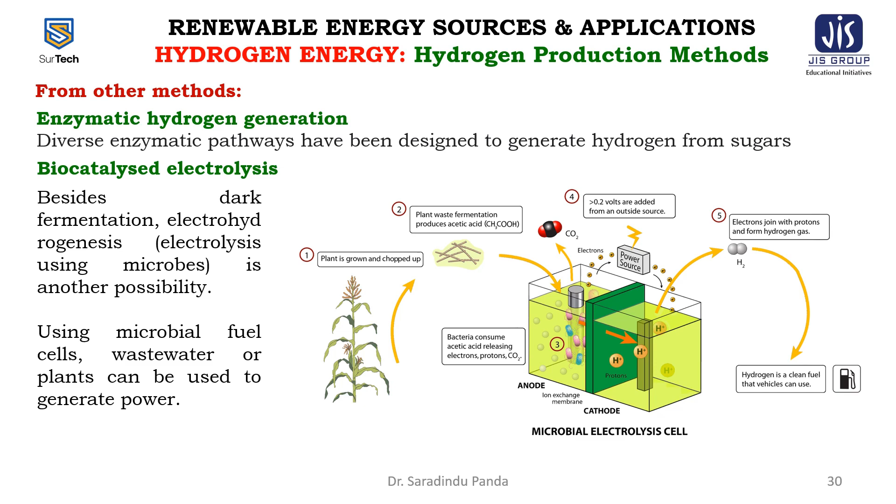Biocatalyzed electrolysis should not be confused with biological hydrogen production, as the latter only uses algae, and with the latter the algae itself generates hydrogen instantly. Whereas with biocatalyzed electrolysis, this happens after running through the microbial fuel cell, and a variety of aquatic plants can be used. This is the microbial electrolysis cell.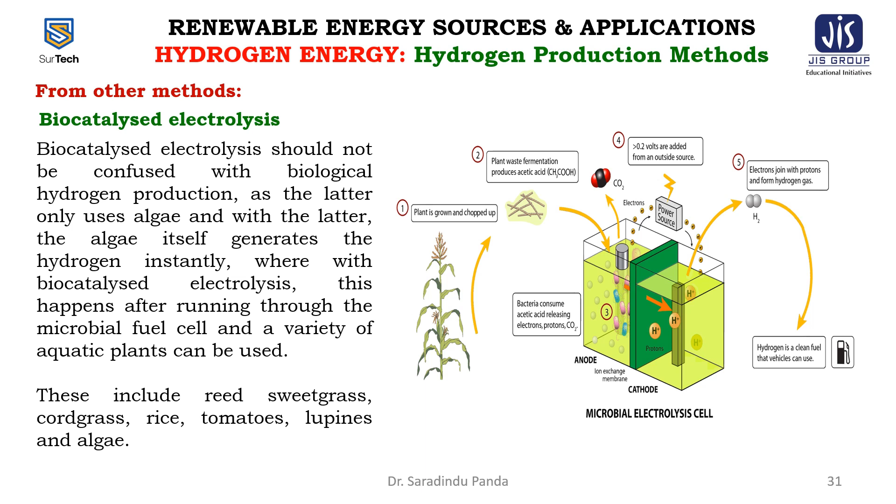This includes reed sweetgrass, cordgrass, rice, tomatoes, and lupins. Lastly, the process is the nanogalvanic aluminium alloy powder.

An aluminium alloy powder invented by the US Army Research Laboratory in 2017, which was shown to be capable of producing hydrogen gas upon contact with water or any liquid containing water, due to its unique nanoscale galvanic microstructure.

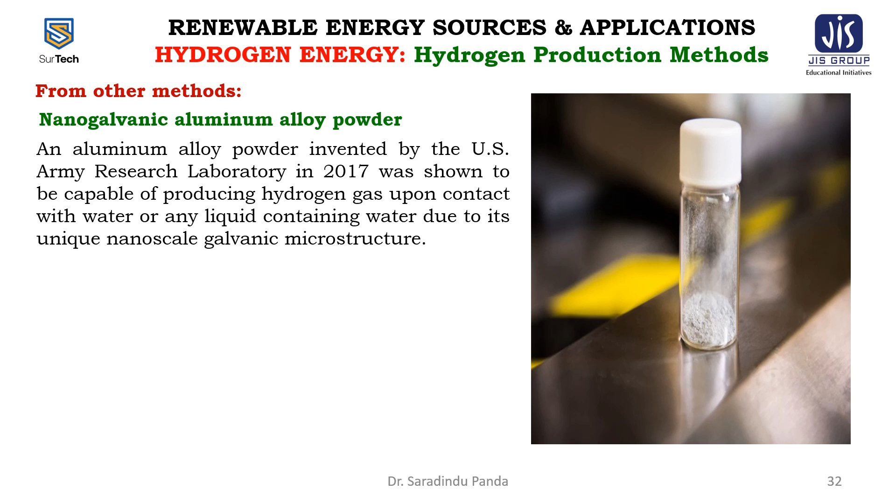In the next lecture, I want to discuss the storage of hydrogen energy and the transportation of hydrogen energy, and the advantages and disadvantages of hydrogen energy.